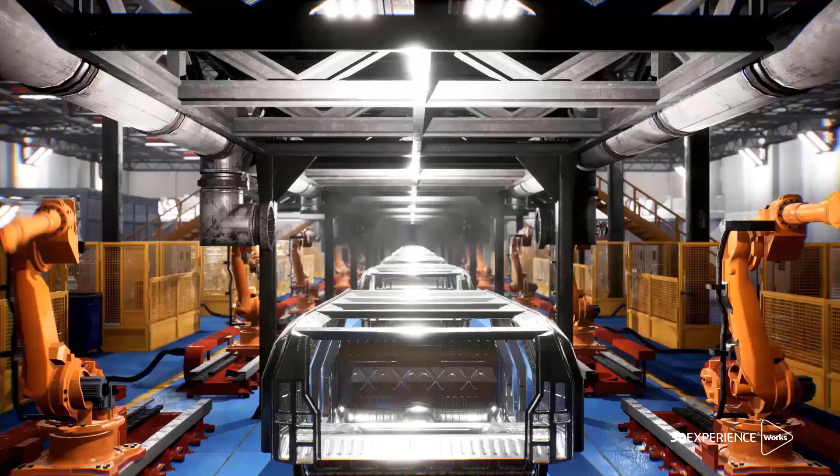Machine reliability becomes very important to avoid loss of service revenues due to downtime. Think about the consequence of downtime of farm equipment, where an entire crop can be wasted if not harvested on schedule. At the same time, customers are looking for products that can perform ever more complex and smart functions. This means that equipment manufacturers must design and verify a wide variety of products meeting the short delivery schedule with minimum cost.

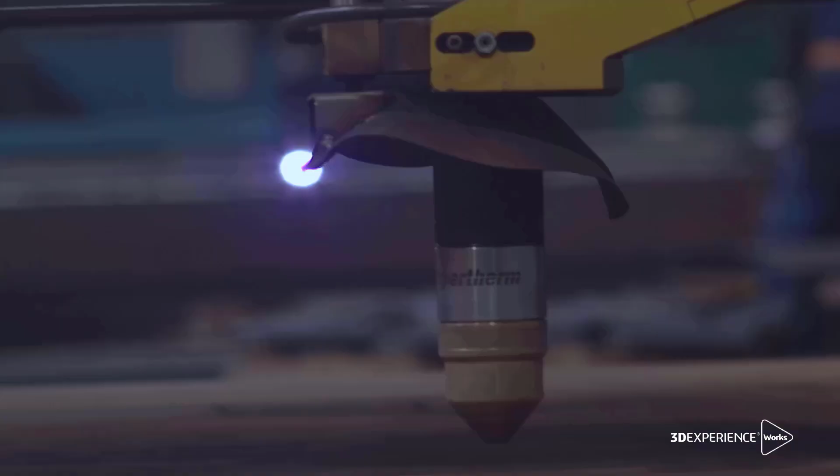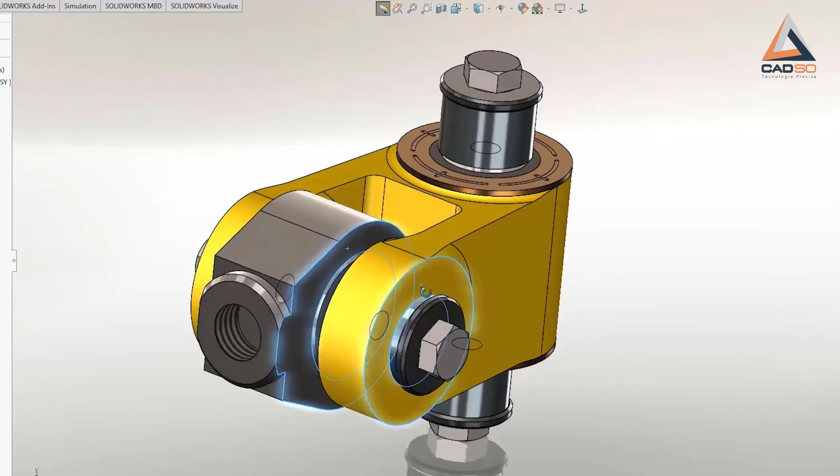CADSO provides us with technological solutions for the design, analysis, and management of our equipment. The SolidWorks portfolio helps us to conceptualize, create, validate, locate, manage, and transform our innovative ideas into excellent product design for the manufacturing of mining drilling equipment.

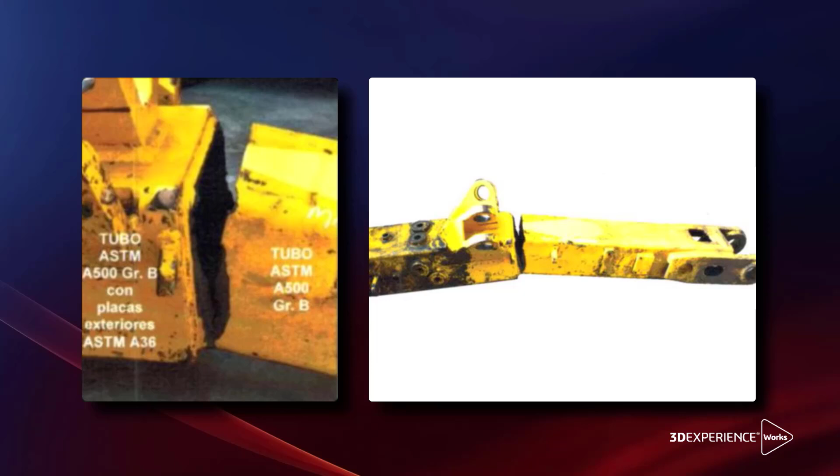Expensive physical tests and field failures can be minimized by leveraging the power of structural simulation roles within the 3D Experience Works portfolio, leading to faster time to market. Embedded in the cloud-based 3D Experience platform, the Structural Designer role enables users to quickly assess stresses and displacements for various load cases on individual parts and large complex assemblies alike.

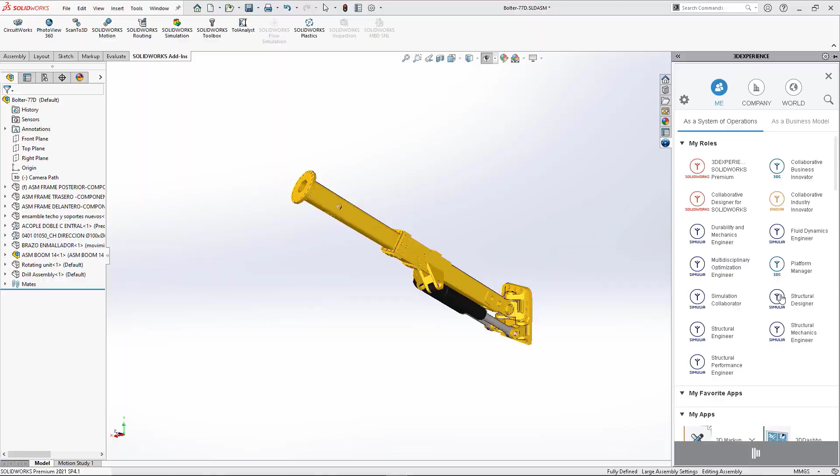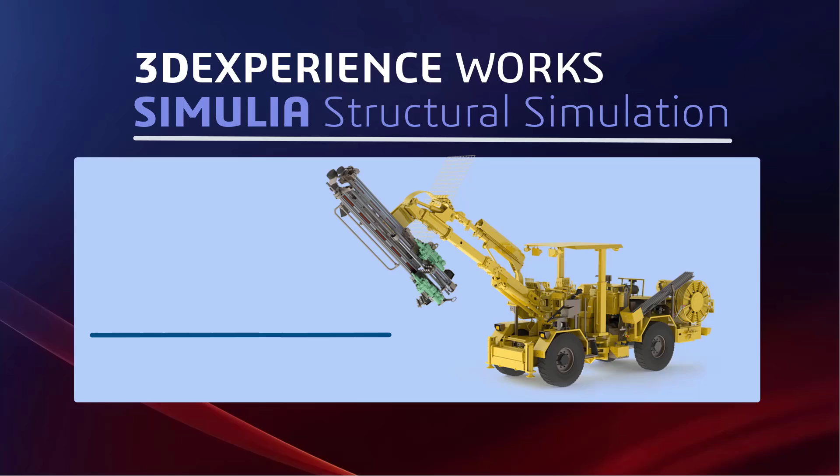Engineers at Resemin can quickly set up linear static simulations directly on native SolidWorks CAD geometry of this boom assembly with minimal interaction. Additionally, the Durability and Mechanics Engineer role allows engineers to assess structural reliability for fatigue failures.

Engineering managers at Resemin can take advantage of lightweight visualization and collaboration capabilities on the 3D Experience platform to review the latest CAD and simulation data, guide improvements, and approve final revision.

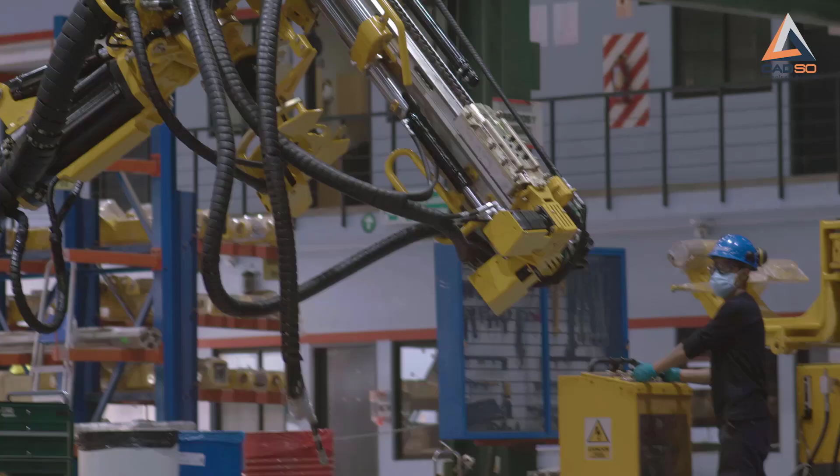We've been using SolidWorks to develop products for more than 10 years. This has enhanced our capabilities in designing machines and marketing them with a more collaborative environment in the company. In that time, we've gone from manufacturing 3 to 4 machines a year to more than 130.

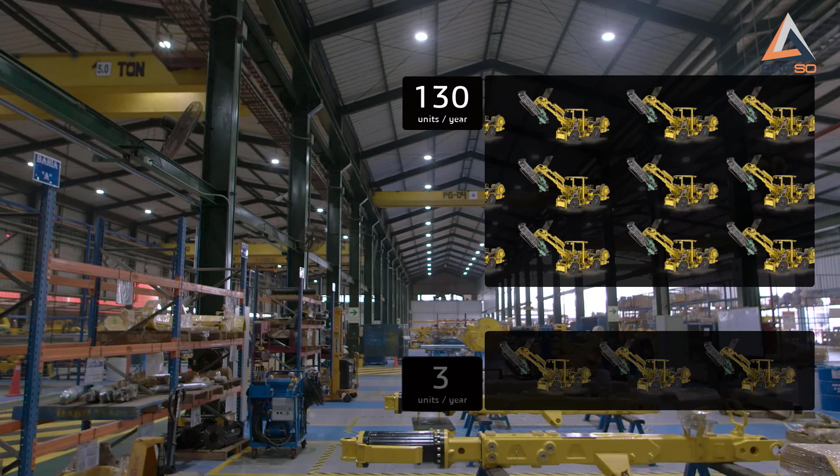The Structural Mechanics Engineer role brings advanced nonlinear static analysis capabilities for designers using SolidWorks to reduce elastomer residual stresses in industrial equipment components like rubber bushings and seals.

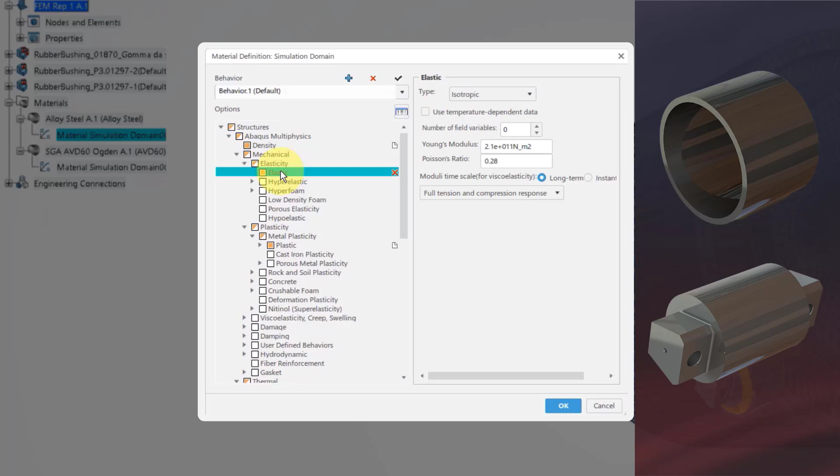In the case of this rubber bushing, alloy steel material is applied to the outer ring and the inner hub. A hyperelastic material is applied to the rubber part of the bushing.

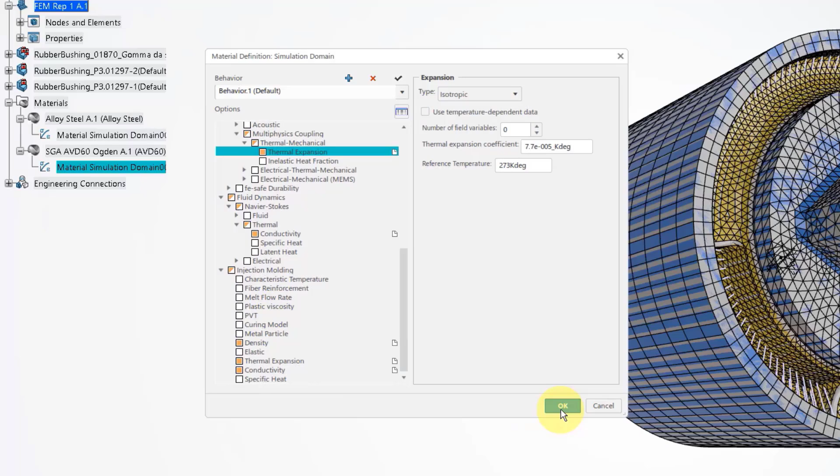Multiple material behaviors can be combined together, such as elastic, plastic, thermal, and thermal structural expansion capabilities to capture the physics scenarios experienced by these components during the manufacturing and testing stages.

Powerful restart capability allows users to choose results from a previously performed analysis as a starting point for a new analysis case. Results from 2 or more simulation scenarios can be compared side by side.

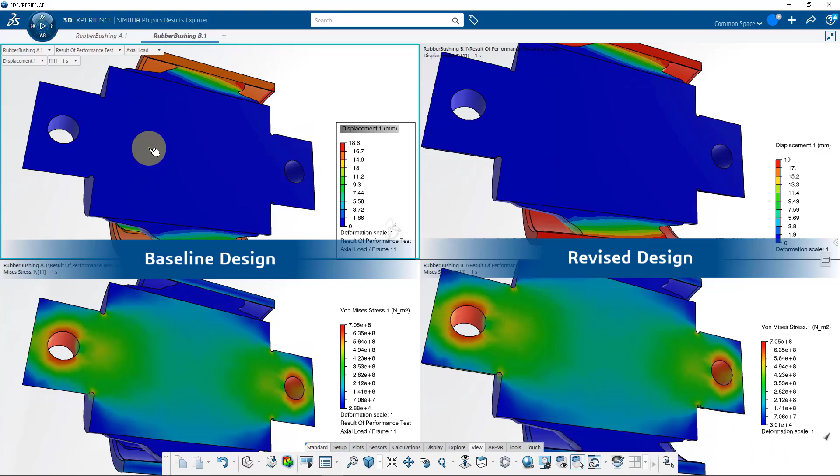Here, the designer is visually comparing field plots for displacements, stresses, and XY plots for force versus displacement stiffness response between the 2 rubber bushing designs.

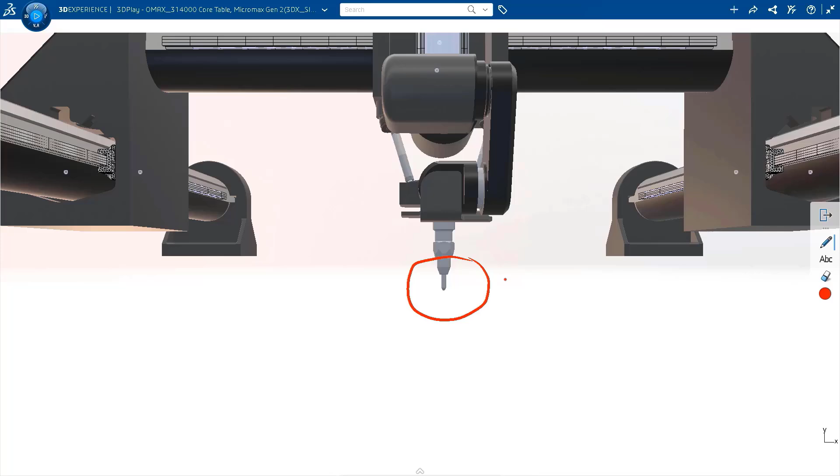Let's take a look at another example. Omax is a water jet cutting machine manufacturer. Their abrasive water jet machines experience low and high frequency vibrations during operation, which could lead to breakdown.

Automated FEM capability, offered by the Structural Performance Engineer role, enables users to focus more on engineering by automating redundant and unproductive tasks, such as mesh definition for every single part.

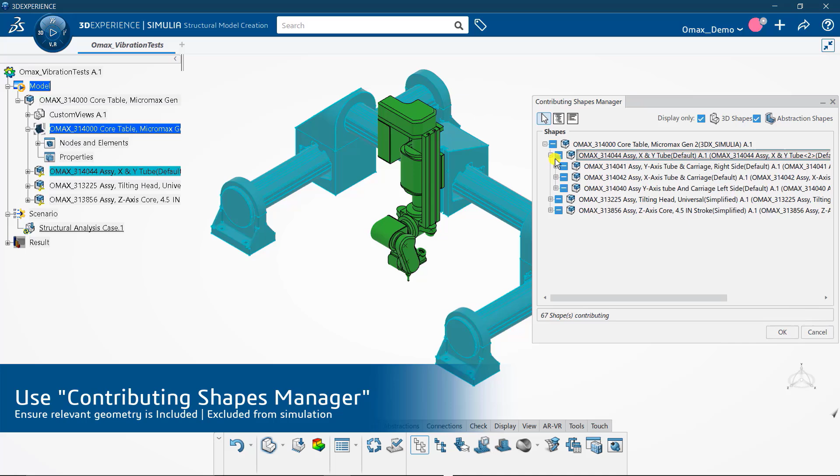The Contributing Shapes Manager works in conjunction with automated FEM to include and exclude components. The Contributing FEM's Manager helps to reference and reuse an existing mesh from a component level into the main assembly.

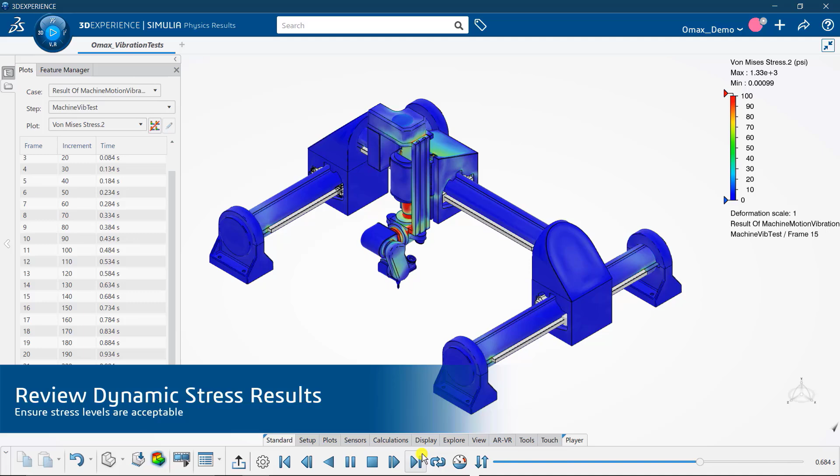The Advanced Implicit Dynamics Simulation capability helps engineers ensure the dynamic stresses are small and within linear range, while the tooltip displaces in a circular path.

Insightful animations and engineering quantities can be superimposed for visualizing instant responses, as well as ensuring expected behaviors of the assembly, which is critical in achieving manufacturing precision.

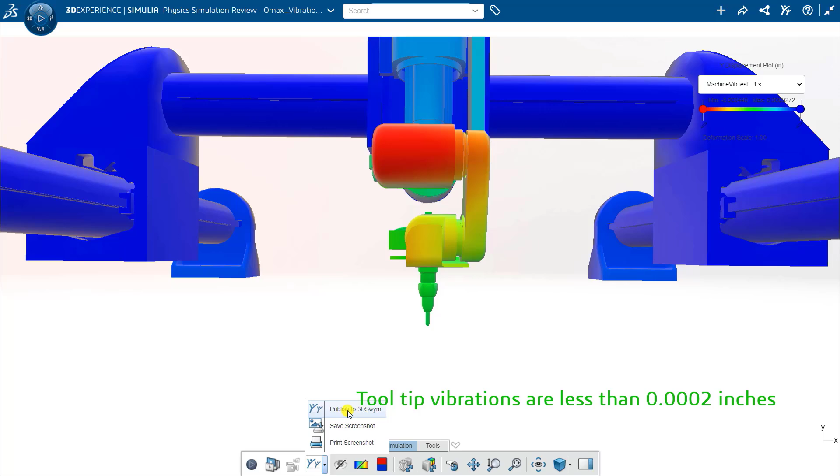Key stakeholders at Omax can easily review structural performance data on a web browser and seamlessly collaborate within the fully connected environment of the 3D Experience platform. This digital continuity not only breaks silos, but also increases productivity significantly, thereby reducing design cycle times.

With Simulia's structural simulation roles included in the 3D Experience Works portfolio on the cloud, you can reduce prototyping and warranty costs, enhance brand value and product portfolio, and accelerate innovation and time to market.